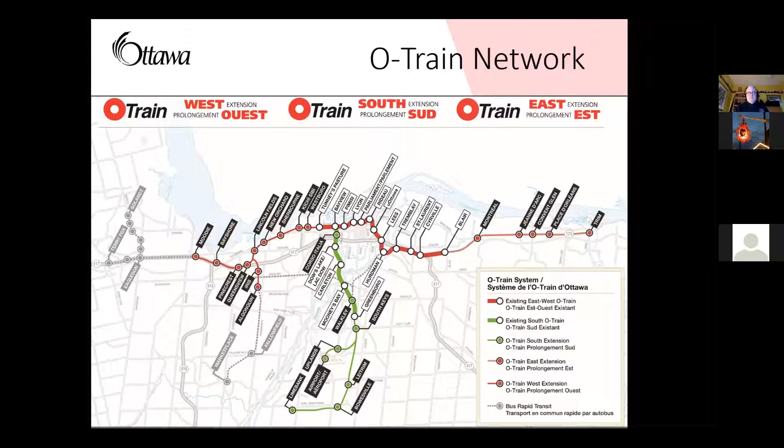We're going to start our presentation today in the eastern part of Kitchissippi as far as our project limits are, with the conversation about the Scott Street bus detour. We have an update for the implementation of said bus detour, which is to be on June 26th, in line with OC Transpo's service change. And that's when we are going to be closing the transitway from Tunney's Pasture all the way to Kìchì Sìbì.

Now, that is going to be the primary focus of our conversation today, the first quarter of our conversation today. I will suggest that the detour will be in operation until the project... looks like people can put on their videos. I'll do the same thing so I don't feel like I'm talking to myself.

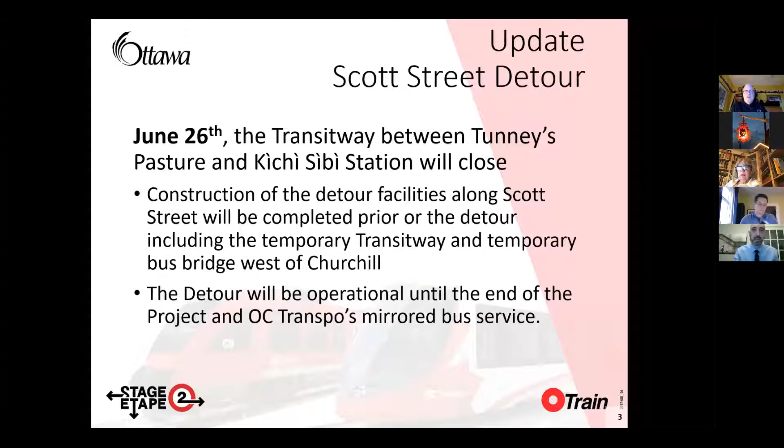The Scott Street detour will involve taking buses from the transitway and putting them onto Scott Street, the Scott Street extension, across the trench, onto the Workman detour, and onto the SJAM Parkway. But it also means enhanced upgrades for people who use Scott Street and maybe didn't enjoy it for a while.

We are expanding the multi-use pathway on the north side to a 4-meter westbound cycle track and sidewalk. On the south side, we've got new sidewalk and eastbound cycle tracks, new protected intersections at Churchill, as well as at Goldenrod and Smirle, and new bus priority phasing and lanes at a few key intersections. Unlike in stage 1, we are not expanding Scott Street in its entirety to a 4-lane to add that extra lane. And the Westboro Station temporary transitway stops will be in effect until the mirrored bus service ends.

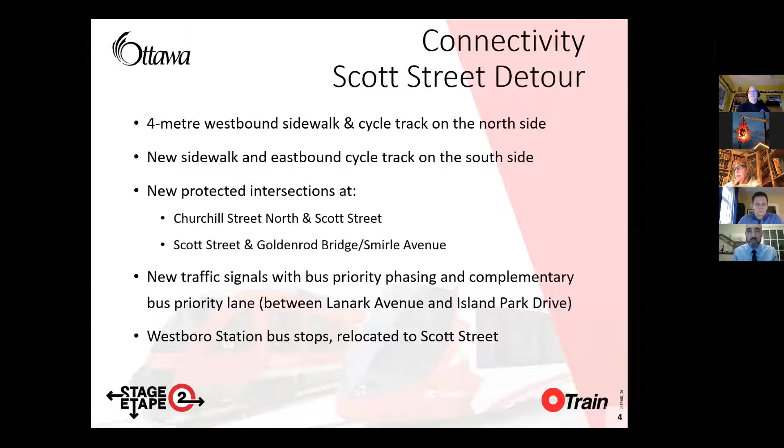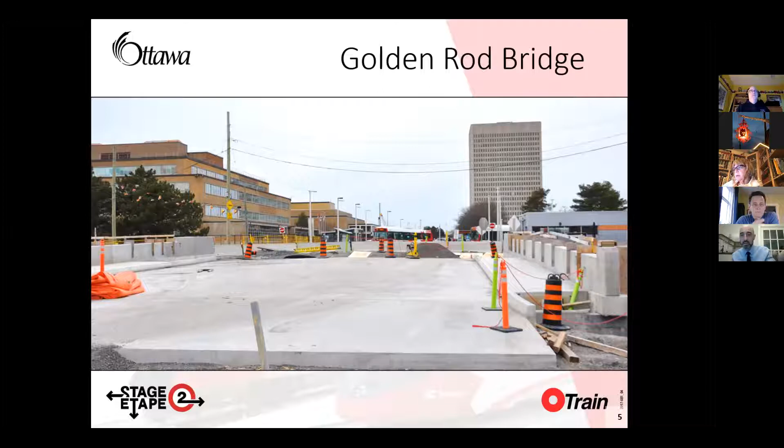Its intended use is to facilitate the Scott Street bus detour.

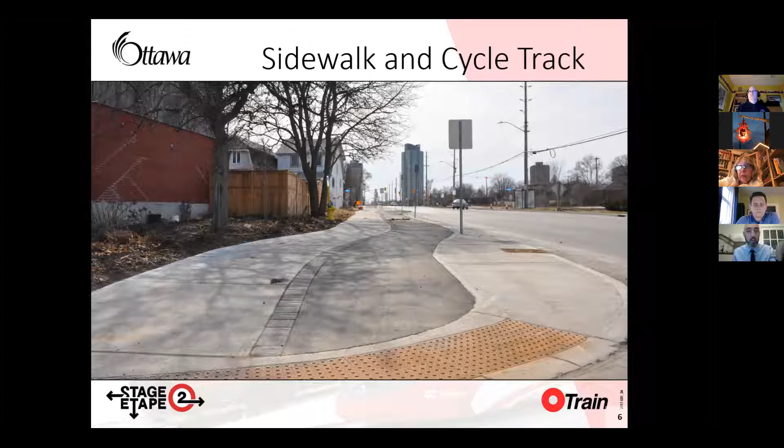There is still some work to do, which is why we are not opening this bus detour yet, but there is some work to do.

So we have upcoming in May a 2-week period of utility works that will detour Scott Street for all eastbound vehicles. Scott Street will be closed at Churchill for all eastbound vehicles, which will be directed to use other routes for this 2-week period. Westbound traffic will be maintained, as will pedestrian connectivity.

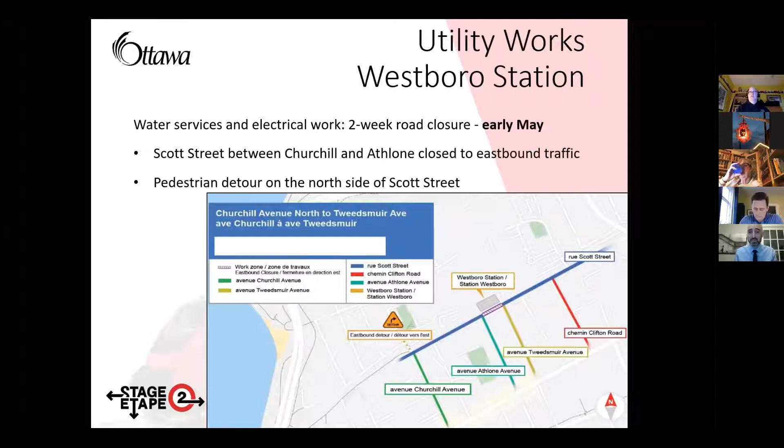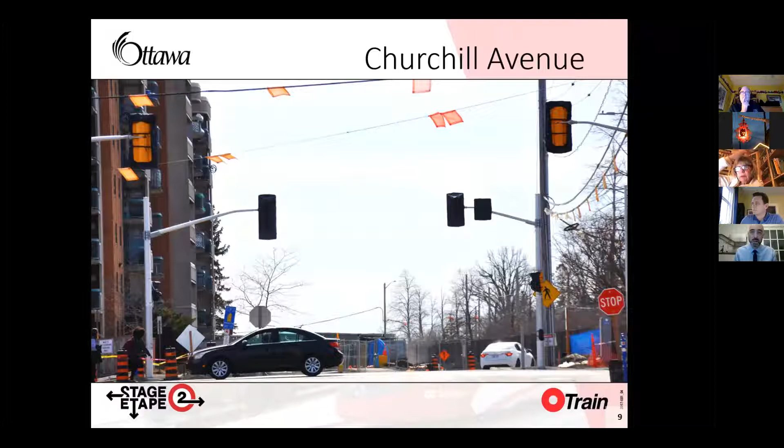Unless, of course, you remember that at the outset of this project we realigned Scott Street and the SJAM Parkway to allow for tunnel construction, because the eastbound SJAM lanes were in conflict with our tunnel alignment. Once the SJAM is put back into its alignment, it will run over top of the underpass, and the underpass for pedestrians and cyclists will work as intended.

Currently we do have an anticipated opening date of late 2023. I will ensure that Ethel and Megan continue to keep the community and the councilor's office apprised of the progress of this very important connection.

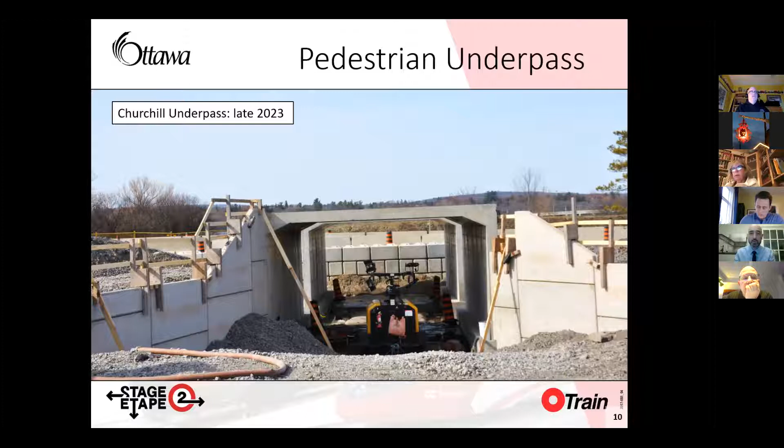What we will have are temporary sound mitigating panels installed up along and all along. More information will be shared about that in the coming months as well.

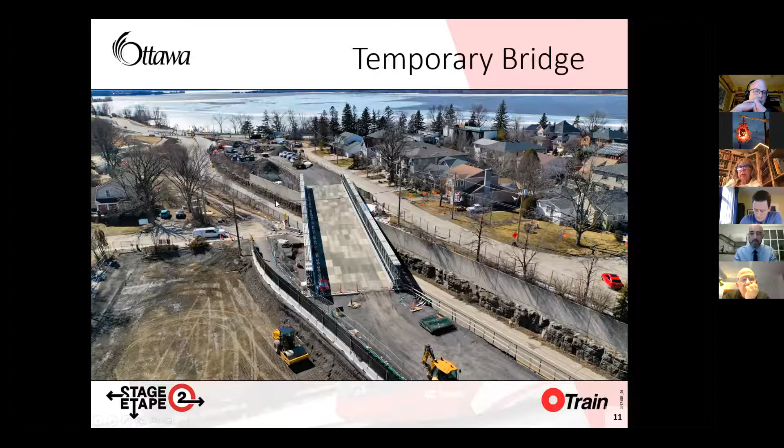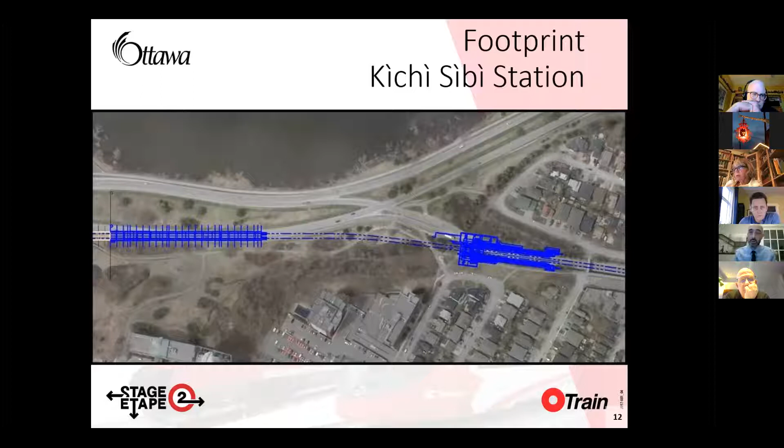Now, I wanted to provide residents with an opportunity to understand the footprint, because we spend our time thinking this construction doesn't really affect much of anything, but here you're going to find yourself with the Kìchì Sìbì Station head house, and then track level down below, and that's what we see here: the head house with the track level expanding there. This is the track, and this is where the ramp or slope begins. For approximately 40 to 45 meters, the train will progress on a 5% slope before it reaches a depth of approximately 10 meters as it continues underground.

Upcoming works that we can expect if we live around Kìchì Sìbì Station: electrical works, which are going to upgrade the conduit, which will provide sufficient power to the station. Rock breaking and line drilling, we're anticipating April through June.

Why do we need to break the rock if the station is going within the existing trench? Because the head house requires a wider footing. The head house requires that we have connectivity to the lower level, in the scope of elevators and stairs. Thus, we need to ensure that we have the width in addition to the track alignment. This does not mean we've shifted the station. We have not shifted the station.

Station construction is anticipated to begin in late summer, early fall, 2022.

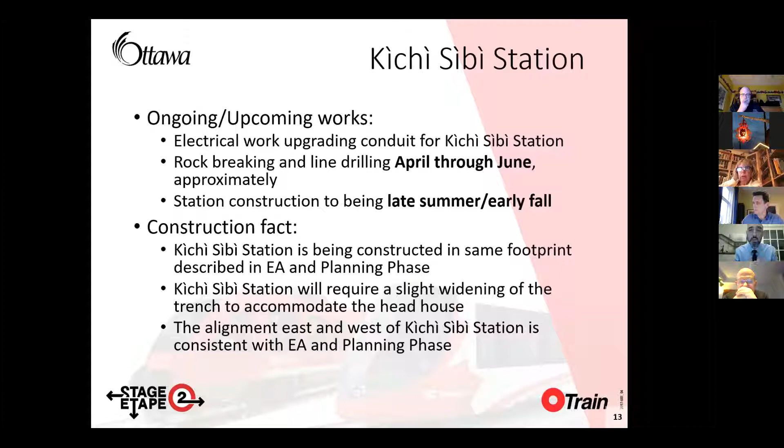I am now going to belabor some points for the benefit of people listening. Kìchì Sìbì Station is being constructed in the same footprint that was described during the environmental assessment, otherwise known as the EA, and the planning phase for the Stage 2 project. Kìchì Sìbì Station will require a slight widening of the trench to accommodate the head house. The alignment east of Kìchì Sìbì Station is the same alignment as the EA, as the planning phase, as the IFC drawings, which are issued for construction. I'm not meaning to speak down, but I am aware that there is some misinformation out there, and I'm going to do my best to arm you with proper, useful, correct information. Thank you.

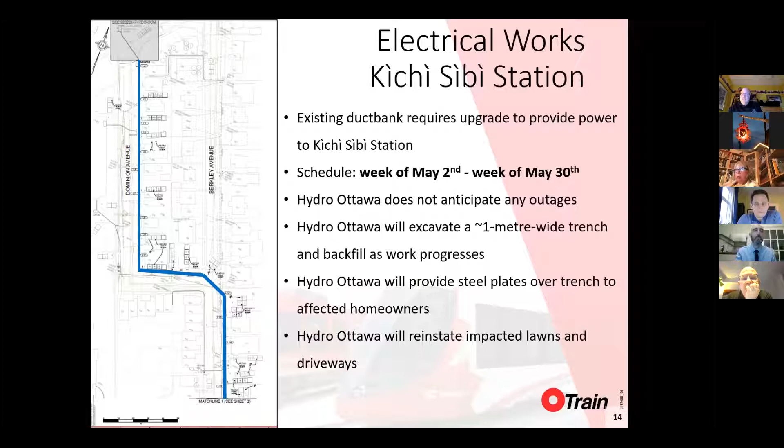The south side pathway. This is a very important pathway. You may remember in previous presentations I had a slide that discussed the north side pathway of the Sir John A. Macdonald Parkway, which will remain open throughout construction, whereas the south side pathway was unable to be maintained and retained due to its, at times, conflicting nature with the alignment.

The NCC, acknowledging that the project was going to impede the opportunity for this pathway to remain open, allowed the project to close it and designed a new pathway to be built when the space and the project allowed for it. Currently, this pathway is planned for, and it is meant to be delivered, if I'm not mistaken, this summer. This is going to be an important connectivity piece between Rochester Field and Kìchì Sìbì Station. Once it has the opportunity to extend all the way to Cleary, it will do that again. However, this is the first step, and a very exciting step, because we all believe so strongly in connecting our communities with the infrastructure that we're building.

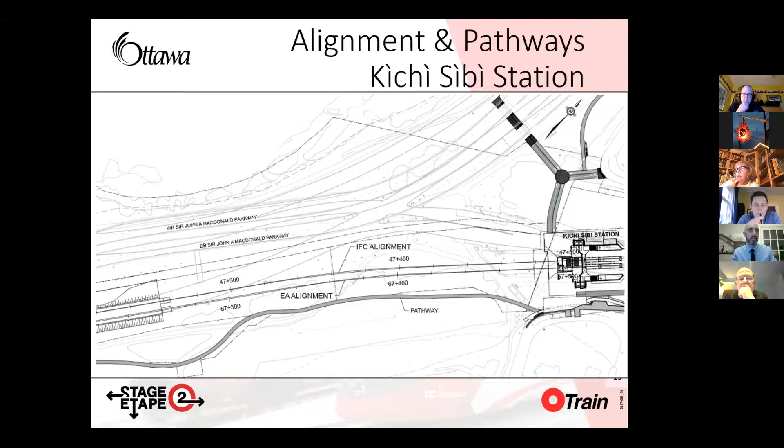We've managed to connect Rochester Field and cut and cover all the way to Richmond Road. Concrete tunnel boxes have started in the east, starting with the invert slabs, which are the floors. Then we will find ourselves with the walls, and then the top of the box, which is the roof of the tunnel, or the floor of the earth that will backfill above it.

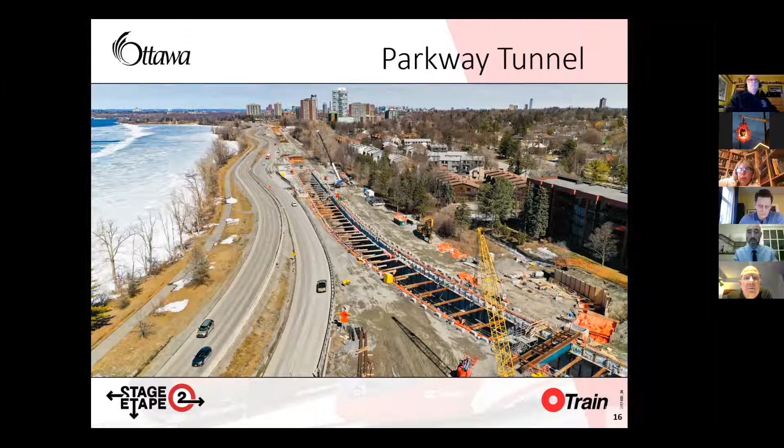A little further east, from a slightly different perspective, you can actually see the progress in the excavations as we approach Richmond Road. None of this is being done in a bubble, and yes, this is challenging for many people. We thank you so much for your patience, be it where you live, where you commute to, or how you commute. Thank you.

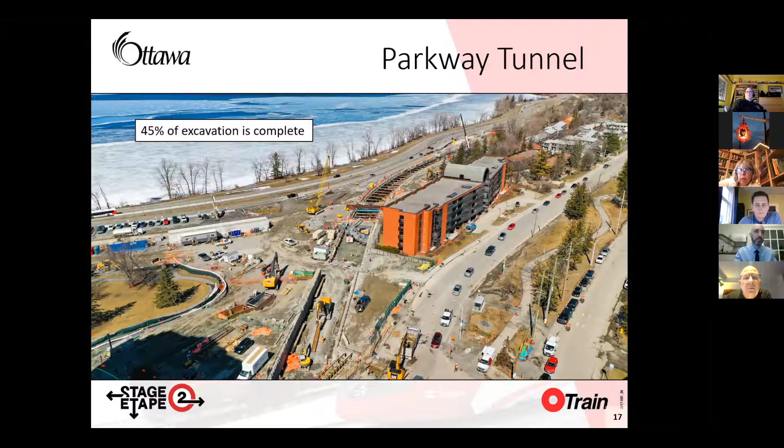As we now approach over to Cleary, I'd like to point out the 1,200 meter water main that has been ongoing since November or December of 2021. That is nearing completion, expected to be completed this month, might bleed into May, but we're at the tail end of this very important work that, once done, will open the floodgates for other excavations down the line, which have been put on hold to ensure this important piece of infrastructure is protected.

Also pointing out that there are upcoming detours on Richmond Road late this summer. We anticipate Richmond Road to be reduced by a lane to accommodate some utilities work. We'll get you more information on that as it gets closer to time.

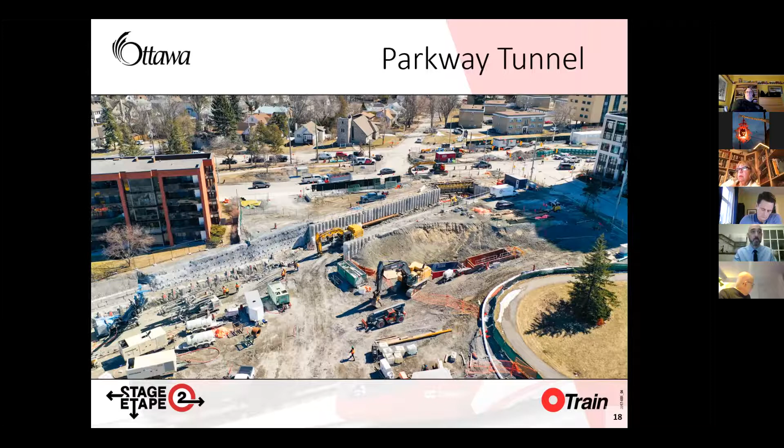Here we find ourselves at Sherbourne Station in Byron Linear Park. West of Cleary, the excavation is largely completed and the concrete works for Sherbourne Station are currently underway.

I am providing updates to individuals interested in understanding the schedule and road closures for the concrete pours of the Byron Linear Park Tunnel. If you're interested in being added to that distribution list for the Byron Linear Park Tunnel only, please feel free to email me at damon.berlin@ottawa.ca. I'll gladly add you to the list.

I'm working closely with Kev. Kev is providing us generally a day-ahead confirmation of a pour. I'm able to send an email out the day before identifying between what blocks the closure is going to be, how many trucks are going to be involved, the expected start time, and the expected end time. This has been a big help to a lot of people in and around the Byron Avenue area.

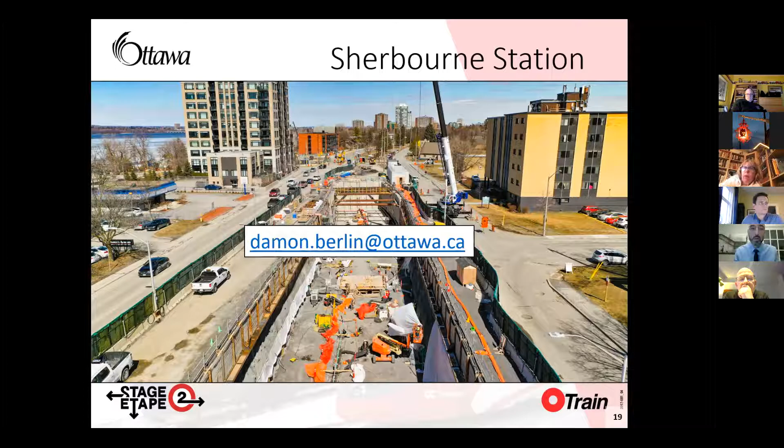Now, just to belabor the connectivity point, because I know it's so important to our councillors on this call, as well as to the staff and residents primarily, while I pointed out that we do have the Churchill North underpass, and we saw a picture of that, this just demonstrates Churchill Avenue. I was looking at this image and thought it's clear to me, but maybe not to everyone else. This is the footprint for Kìchì Sìbì Station.

This is the crossing of the SJAM Parkway. This is Rochester Field, with a signalized crossing right there as well. And then at Cleary, there's an underpass. Now the underpass won't be available until 2024, and we are anticipating the Churchill North in 2023. Again, any updates on those dates will be provided to the community, as we understand how eager everyone is to get to the river safely.

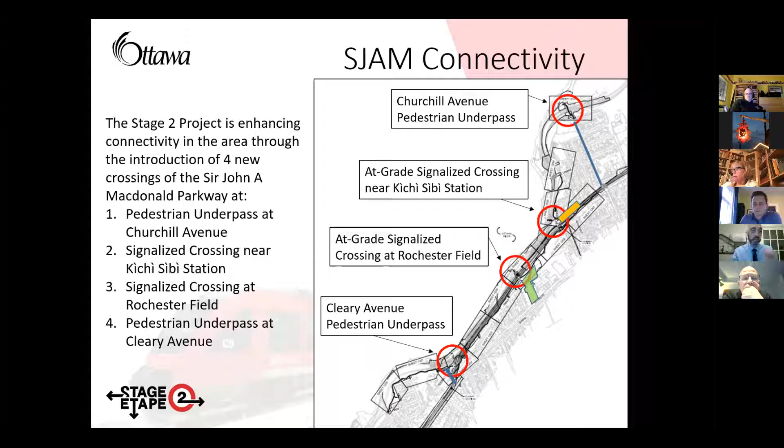I want to point out that we are anticipating construction of the pathway the NCC designed this spring, hopefully available to the public this summer. That is going to bring people from Rochester Field to Kìchì Sìbì Station. Once the space has been made east of Rochester Field, that pathway too will be constructed and open to the public, but that is ways away. As you recall from photos a few slides ago, that very impressive cut and cover work is effectively exactly where that pathway is.

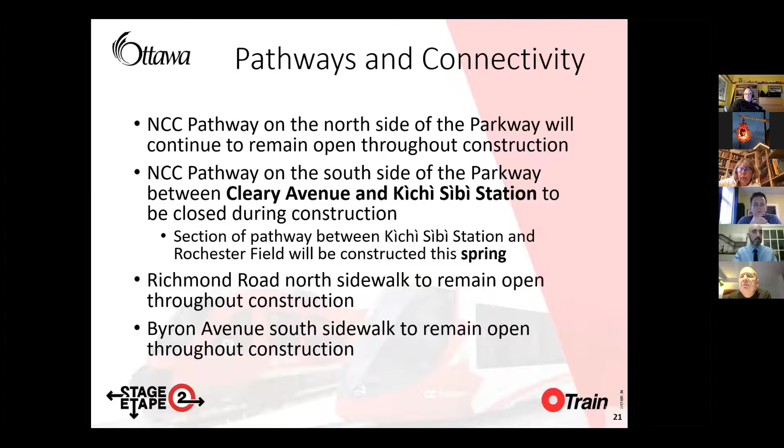I know we are now at the outskirts of our area, but I do like this slide. For those who haven't joined us before, it's important to show how many opportunities there are for signalized crossings and PXOs, or pedestrian crossings, along Richmond Road that will be installed with the complete street project undertaken in the coming years.

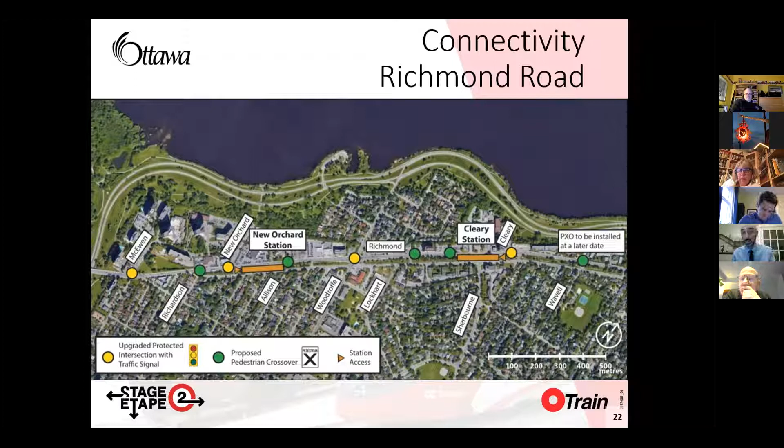And lastly, as a final piece of infrastructure, which won't be seen until likely 2024, the final alignment of the Sir John A. Macdonald Parkway. This is also an NCC design that Kev has undertaken to reconstruct at the outset, upon completion of their tunnel construction.

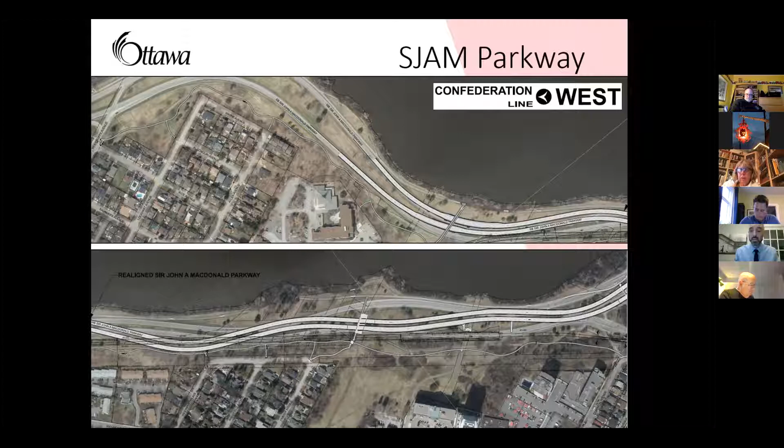This messaging is important to remind everyone about. With spring and the half load restrictions removed, along with all the excavation and construction, you're going to see an increased level of vehicles. Those trucks are required to use city-approved routes or traffic control plan approved routes. There will be vibration, of course, however that vibration should be well within limits and should never bother the infrastructure of your home or your apartment. Noise and vibration is always part of construction.

They have monitors at their loudest and busiest points and report those findings to the project. We can make that available if there are residents who feel like something is not right — we can get the data and demonstrate that. I think that's a wonderful resource that Kev's been providing, and a great resource for everybody involved.

In the winter, we had heaters to help cure the concrete, and now we have generators to pump out the infiltrating groundwater. There are regular requirements to use machinery overnight just to ensure the excavation of the construction continues, and without the snow, we don't winter maintain anymore — now we've got to start cleaning streets.

Now we've got to start cleaning streets. I know that Kev walks a tightrope, and we've talked about this a few times, but street sweeping and street washing are high on their list of things to get done, and high on community interest. I will point out that...

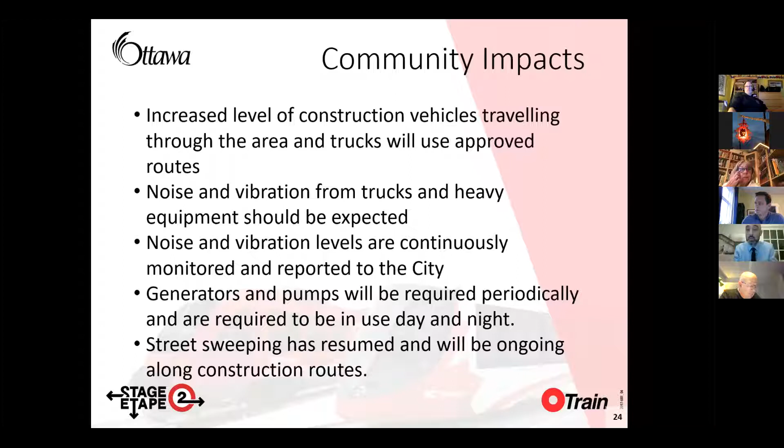When you tell us that there's been a lack of cleaning at an area, which occurred last year, I gave that information to Jamie and Jen, and they were quickly getting the sweeping company out there, cleaning it up. So I want you to understand that there is a direct correlation between you contacting us and Kev doing work that will benefit the people around.

Construction hours in the city of Ottawa are Monday through Saturday, you can start work at 7, finish at 10. If Kev has an active permit, which they do, they can work overnight, but that requires them to provide notice. I know they've been providing weekly summaries of night work in the wards in the West, and I think Tom's been sharing that.

Overnight you do have vehicles being fueled and maintained, and construction lighting, of course — if you're working overnight, you do need to see. However, Kev makes every effort not to direct lighting at homes. Sometimes that's not possible, in which case they have shades and other blockers. If you do feel like it's being directed into your home, let us know and we'll work with Kev to fix that.